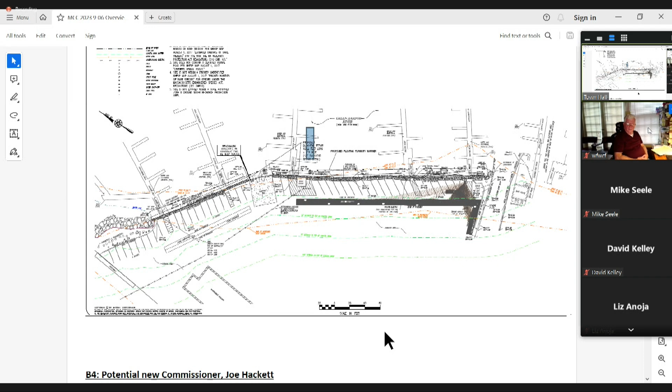I have a question about right in the center of the drawing. Portions of the wall are missing halfway down. What do you do with that? If there's blocks that need replacing, the blocks will be replaced in kind. Those are some of the damaged blocks — they're not missing, they're deteriorated. There might be some blocks we need to shore up, replace, or slide in a new block. But for the most part, I inspected that wall a couple weeks ago, and it's mainly cleaning them off and repairing them with the same face as the existing block wall.

Then we can do the shotcrete application. The repaired blocks will have the actual rebar extended out of them to save time as they go along, and then they'll make the application. It's a nice looking stucco style finish, but thicker — a 4-inch thick application of plastic cement.

And I think you have discussed this with Dave Hill at DEP? I have, and he's in support of it. You folks have the email — he's in support of it, and he's asked that you kindly reciprocate with him as well. I have the email right here if you want a paper copy. But you guys have it as well. Do you have that, Mike? I don't have a physical copy with me. But you do have one. Yes, I believe so. Just double check.

Anybody else? The cleaning process — is that just high-pressure wash with fresh water, or special chemicals? No, that's it. They might hand spray some bleach on it to kill the mold before they go through that, but that's about it.

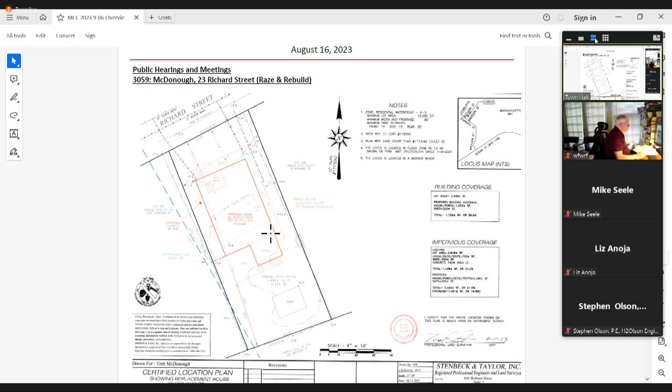They're just going to be reconnecting the existing utilities that are there. It's going to be elevated higher than the requirement, but they're looking to maybe possibly park under the structure with vehicles once it's up there. So essentially what they're hoping to do is just build a new flood compliant home, and that's pretty much it.

I just have one question before other commissioner comments. The narrative does say 7.5 feet above the grade level, but on the plans, the site plan says 20 feet above the top of the wood pile. So in VE 13, could you explain that? Yeah, absolutely. So that 20 feet is the elevation of the top of the pile, above mean sea level. The ground level there averages from 12.5 to 13. I averaged it out, it's about 7.5 feet above the ground surface. Okay, great, the piles will be at elevation 20. In a VE 13, you're required to have the piles at 2 feet above the 13, so required to be at 15. Right, and they're going to exceed that just to possibly get some parking under the structure. But that 20 is 20 feet above sea level. Right, okay, I assumed that, but I just wanted to be sure. And we'll get an elevation certificate, that will be required. Yes, great, that was my main question.

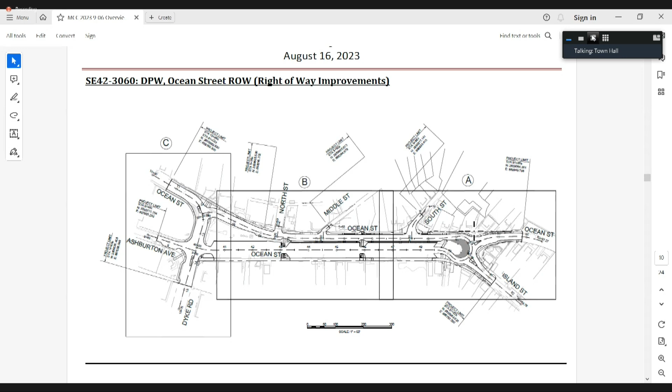In this area of Brant Rock on Ocean Street, we're trying to create some traffic calming features, better sight lines with traffic, bicycle lanes with markings, and basically replace the pedestrian sidewalks that are there now. They're a little undersized and need to be beefed up to bring them up to a typical Mass DOT type code. That's generally the objective of the project.

As we go from right to left, the middle section is pretty straightforward. It's one lane in each direction. Ocean Street flows to the east at the bottom, to the south, and the top, the northern part of Ocean Street, flows to the west.

As we get into the intersection with Dyke Road, that's also being addressed - it's basically a new traffic feature that includes better sight lines for vehicles so they can see oncoming traffic, and better pedestrian and bicycle access. So connectivity with pedestrians and bicycles is also a big part of this.

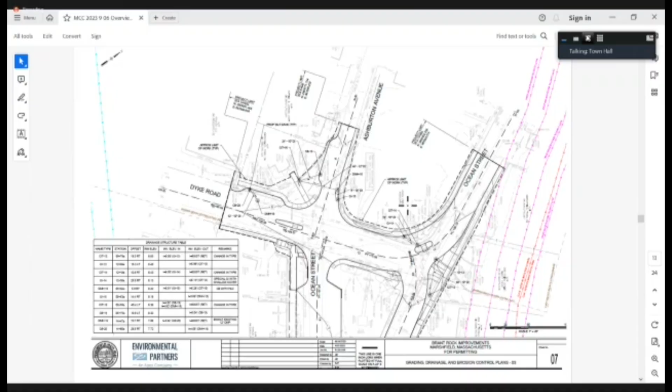And then we're shrinking some of the footprint in some areas throughout the project, so you get a little added green on the edges of your roadway. It's cumulative over the whole project. The two big areas would be both ends of the project, and maybe a little bit of the strip in the middle as well.

Outside of the bullnose, going down Island Street and up Ocean Street, there are two little traffic islands there. Will they be plantable or pervious or whatever?

Those are the platforms for the pedestrian crossings - a refuge area, put a walkway. Yeah, I think these - let me make sure. You're right, I do remember seeing it, but I'm not sure if they would be plantable or not.

Let me just double check here - I was just curious what they actually were. It's proposed as concrete over there. For a reason? I didn't put in these features myself, so I don't have the exact answer, but I think it's because of the traffic in the area, and these are pretty small little islands. I think it's just for traffic and sight reasons - if somebody ran over them, or as far as putting a little green space in there, sometimes they take over those islands and you just can't see. It's tough, happens all over town.

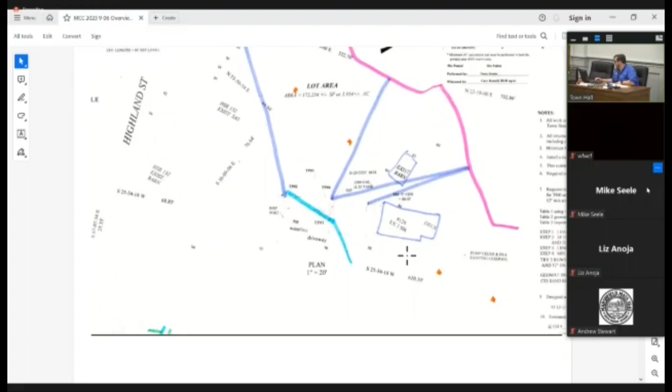Okay, thank you. Mike, what are we looking at here? So this is the site plan provided by Mr. Junior, and these orange squares that I marked up represented conservation markers at which Mr. Junior agreed to those placements. They're roughly on the 50-foot setback. I took out a scale and scaled them out, and as you can see there's two up here and then two over here by the rear of the property. I think we need to do at least one or two more to get around the buildings. I agree. Okay.

And, I mean, could we see those on a clearer plan? Yes, I can. There was another site plan we had on file from a previous project, I think through the planning department, or something sort of nebulous. This was the plan provided by the applicant, so that's what we did the markup on. But yes, we can definitely put that on a clearer site plan for the commission. So there'll be six total markers.

And have the site plan revised to show them. Are you able to bring that up now, or the other plan? I can see if it's on our Google Drive. If it is, then I will. It was before. Yeah, it should be. Yes.

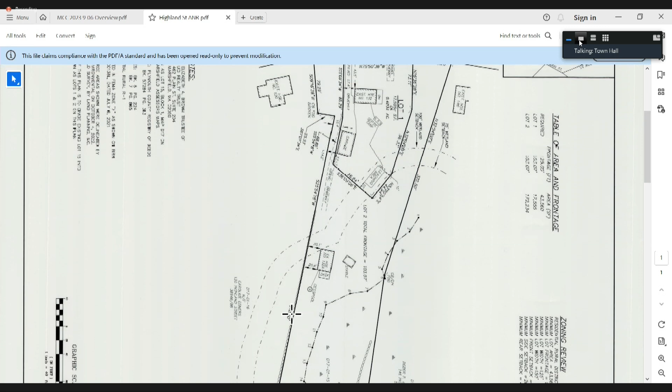So there's existing buildings and existing lawn there, so I think we need to swing it a little closer to the wetland, just to give them room around the edge of lawn.

But then as soon as you get away from the buildings, take it back to the 50. To clarify, around the house and the stable they would be around the edge of lawn. Further away, they would be at the 50-foot setback.

It's 6 total markers. Right now there are 4. I think 6, and on this plan, so that...

And I hate to drag this out one more time. Yeah, I know, but Mike should get these plotted. We'll take a look at it next year.

Something very much worth mentioning: I had spoken to Dana a couple hours ago. He got the permit from Board of Health and installed the septic system, so this is more of an after-the-fact project now.

My apologies, I meant to bring that up at the beginning of this hearing. I saw a lot of trucks there last week.

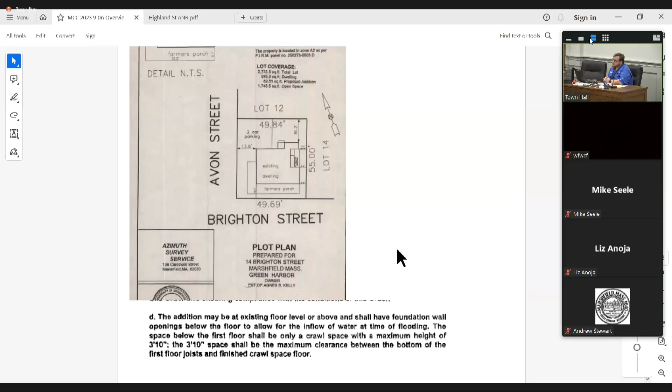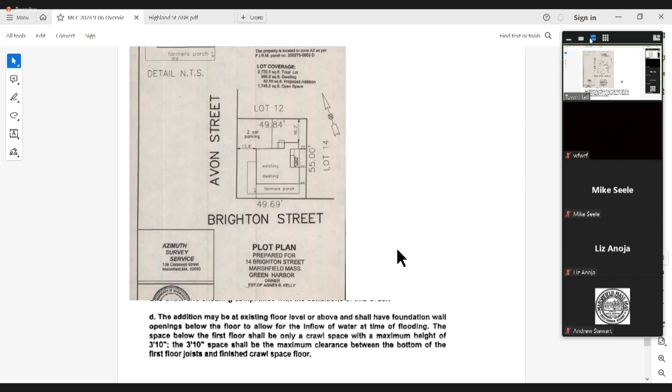So upon our site visit, it's on sonotubes, so there's no crawl space, there's no finished crawl space, and there's certainly enough room for the inflow of water. It appeared the addition was a small addition for like a utility laundry room. It appeared that it was constructed to the first floor level, level with the main door and also the door into the addition.

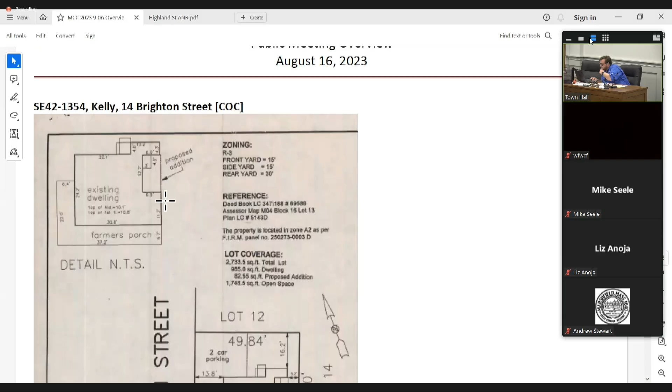So it comes down to the commission's decision to waive the as-built site plan - and this was built like 40 years ago? I believe it was built in the 80s or the 90s, judging from the DEP number, it's quite old - we're at 3,060, 3,000 right now. So does that plot plan represent what's there? Yes, this is the proposed addition here. You can't really see it too well, but it's this 6.5 by 12.7.

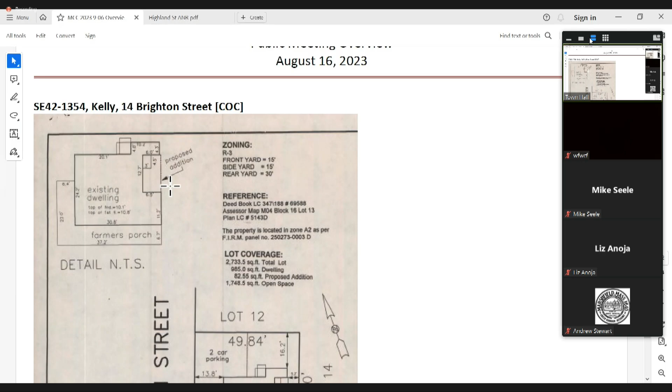And that's what was done? Yeah. That works as a site plan? Yeah, I think so. Or an as-built? Works for me. All right, I move that we vote to issue a certificate of completion for SE 421354. May I have a second? Second. All in favor? Aye.

SE 421564, 76 Winslow Cemetery Road. All right, I move that we vote to issue a certificate of completion. May I have a second? Second. All in favor? Aye. That concludes our business.